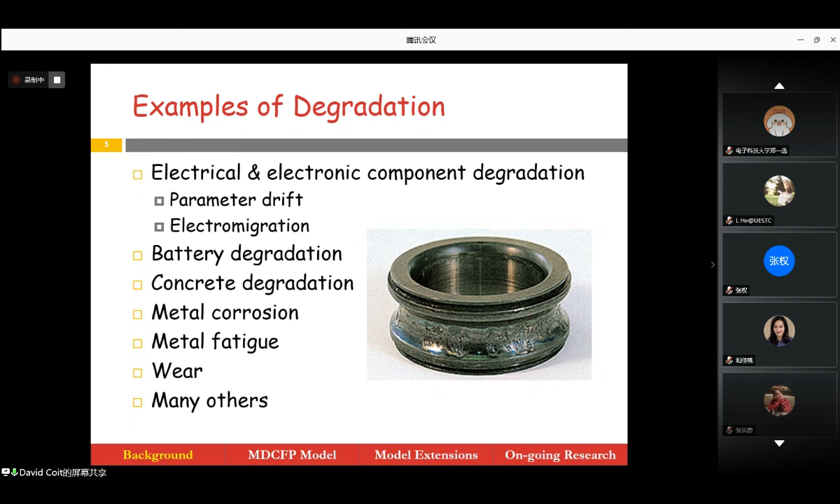Electronics, we usually don't think of as degrading, but there's some examples where they will as well. Batteries, which is a very popular subject matter lately to study the reliability of, degrade in terms of their charge and discharge cycles and how much they can charge. Concrete degradation, which we're studying in bridges, metal corrosion, metal fatigue, wear, and many others.

Let me go into more detail. Now, metal corrosion - you have some metal surface like the pictures show, and there'll be some form of oxidation, a chemical reaction that takes place. And of course, in the design of these products, you try to prevent that. And that leads to some very interesting behavior, where the degradation takes place in two stages: once the initiation of the corrosion, and then once the corrosion initiates, the propagation.

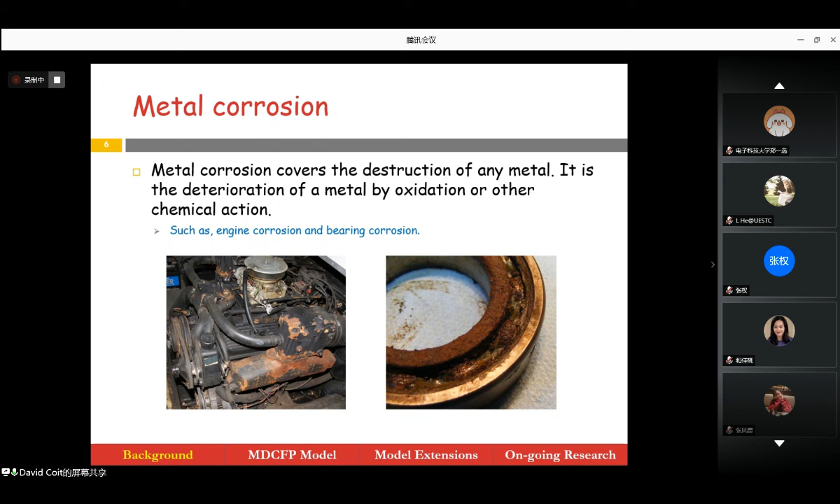And I will talk about that later, and the reason is the current project we're working on - we're working on a project on metal corrosion. I don't know what it's like in China, but in America, specifically New Jersey where I live, we have lots of bridges, and I think the metric I've seen is up to a third of the bridges.

Many of them are very old, could be considered unsafe to a certain degree. The concrete has cracked, or there's some other forms of degradation. To build a new bridge and make it strong, you have a metal rebar. You see on the left some pictures of the metal, different types of metal rebar, some samples, and they're encased inside the concrete. For about a year, we've been testing rebars and measuring the corrosion.

You see in the middle picture some examples of corrosion. On the picture on the left, I'm not sure what the one is in the center, but we're studying the other four types. You have black steel, which would be the most common, you can coat that with epoxy - keep in mind, these are going to be inside concrete. But then stainless steel and the MMFX would be more expensive and higher performance. And so the reason we're doing this testing is how much more reliable will they be - in other words, are they worth it?

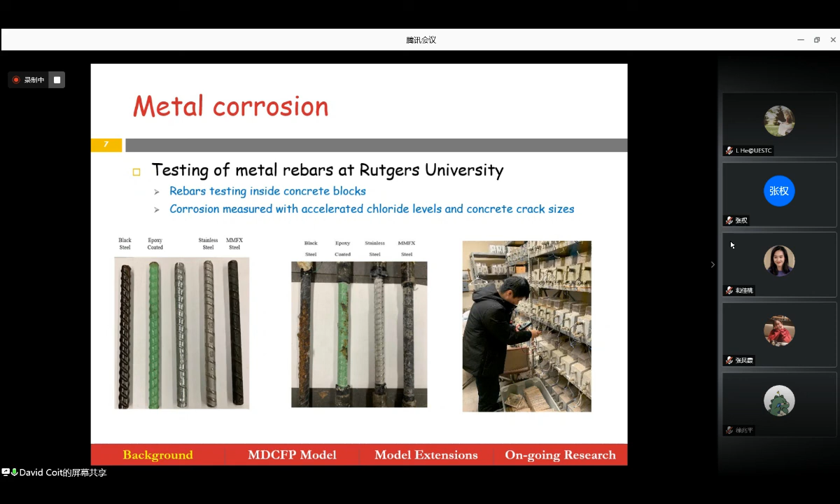And on the right, you see that's Rutgers IE student Jen Hong Lee. I think I saw he might be listening. It's not a real picture, he's just kind of posing.

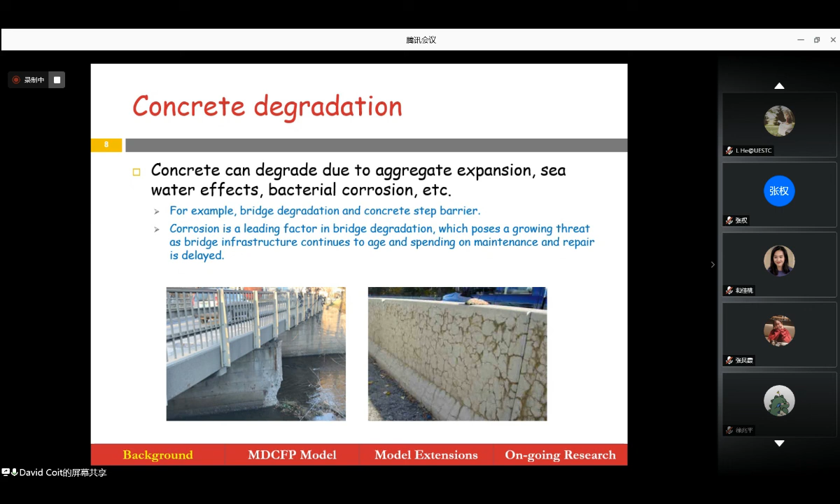So related to the rebar, which is metal corrosion, now you have concrete degradation. So the concrete itself is degrading, cracking basically. But as the concrete cracks, moisture and pollutants and other things can permeate into the concrete. And of course, that's when perhaps the rebar would start corroding.

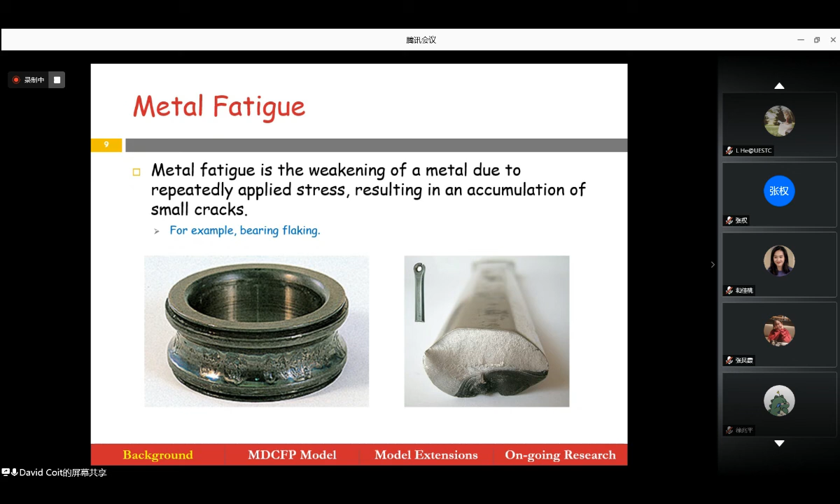Metal fatigue due to stress cycles, and an example of that is here - this is some testing. Qianmei Feng from the University of Houston and I had a very successful National Science Foundation grant.

Her university, the University of Houston, and the manufacturer of stents donated not the stents themselves, but some test samples of the material. She was able to solicit funds from the state of Texas to pay for testing. This is the actual testing done for our project to look at the metal fatigue of the stents. If you don't know what a stent is, it's something that goes into the human body, into your vein, to keep the vein from closing.

So very important. In fact, we wrote one paper treating the human body with multiple stents as a system of degrading stents.

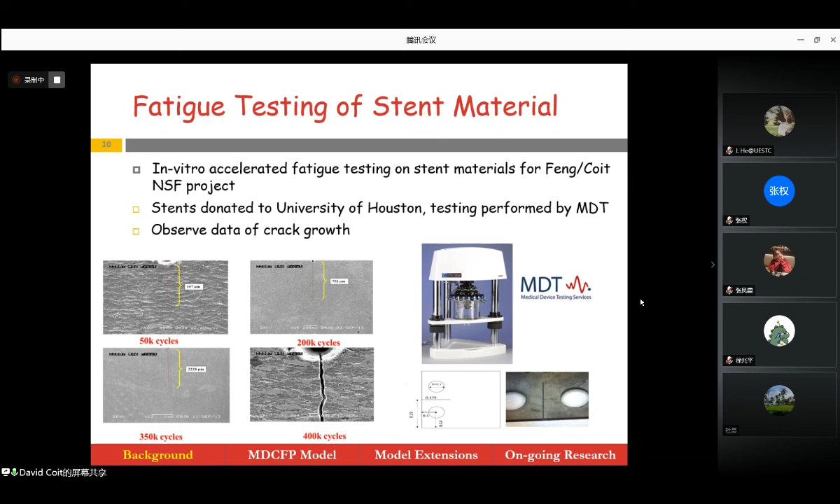Of course, there's wear that we're all familiar with. Anyone who drives a car has wear on their tires or on their bicycle tires. Many other things, many other surfaces wear.

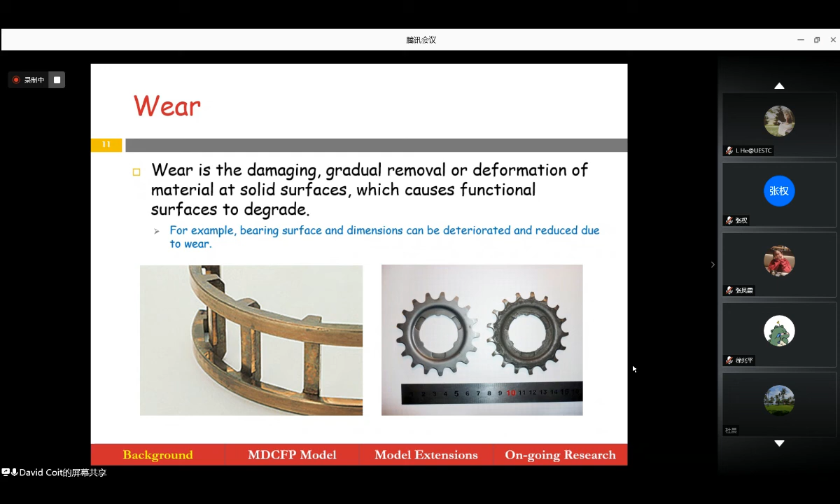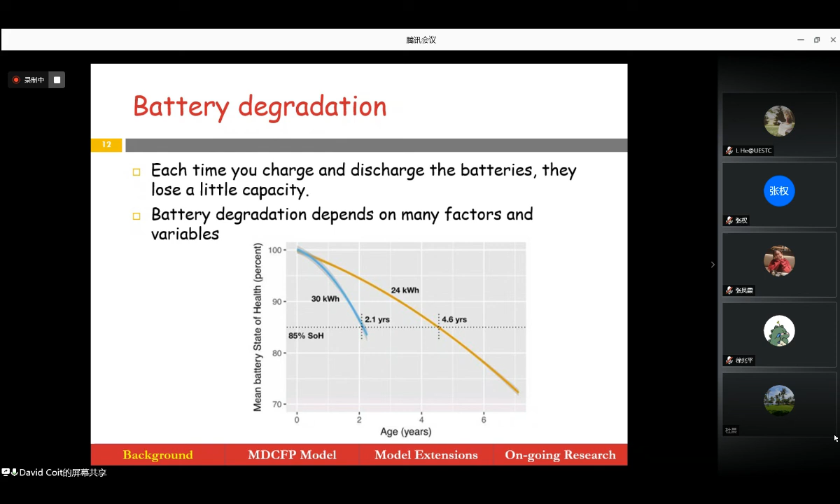Battery degradation—I'm not exactly sure all the reasons why, but right now it's very trendy in America to do work on battery reliability. How they often measure the reliability is what percentage of the original capacity remains when you recharge the battery, like your phone. That amount will continue to decrease until the performance is so poor it's considered a failure.

Now I want to make a real important point here. Of the degradation failure mechanisms I showed, many of them—fatigue, corrosion, wear—are monotonic. What do I mean by monotonic? They don't get better. They only move in one direction, they get worse. The wear on a tire tread gets worse, it doesn't get better. That's an important concept, monotonic failure.

Why is it? Well, the choice of degradation model is important, and some models are monotonic and some are not. The choice of model should match the failure mechanisms. In my studies, most of them are dealing with monotonic failure mechanisms.

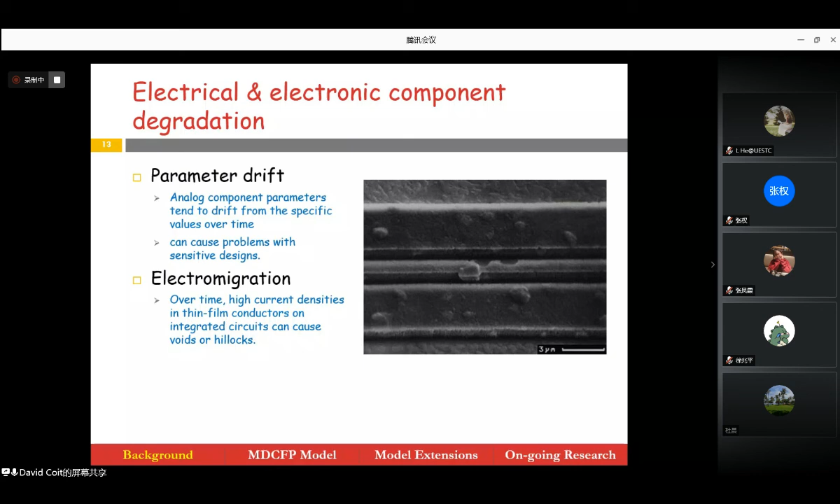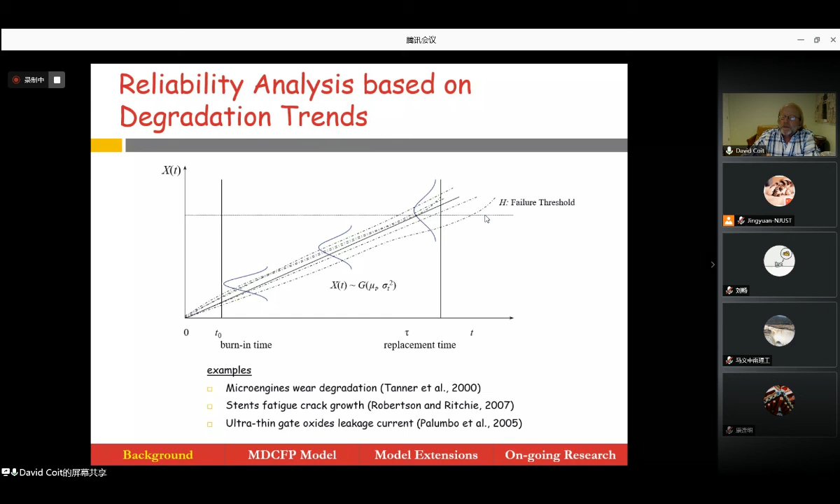Now, let's review, back up. I've been a professor more than 20 years, I teach reliability, and I did research in reliability even before I became a professor. Let's summarize different approaches.

What's the traditional approach? If you buy a textbook in reliability, or attended my class—I haven't been teaching reliability lately, but I used to—I would give you the traditional approach. What is that? I collect data of time to failure, and I fit some distribution: exponential, Weibull, gamma, something else.

And then I use that information to construct a system level model. I make certain assumptions: I assume it's a homogeneous population, and I assume the failure times of components are independent. And I have a model.

Is that a good approach? Well, sure it is. Are the assumptions always correct? No—the failure times might not be independent, the populations might not be homogeneous. But what's another deficiency? Mostly we study the reliability of things that are already reliable. Does that sound wrong? But it's very true.

If something's not reliable, often it's sold for price, or maybe due to the change of technology it's not anticipated to be used very long. When we study reliability, often we're studying things that are already reliable. So you might say, well, if they're already reliable, why study it? Well, it's because they're really important. And because they're already reliable, it's hard to get data. That's an issue.

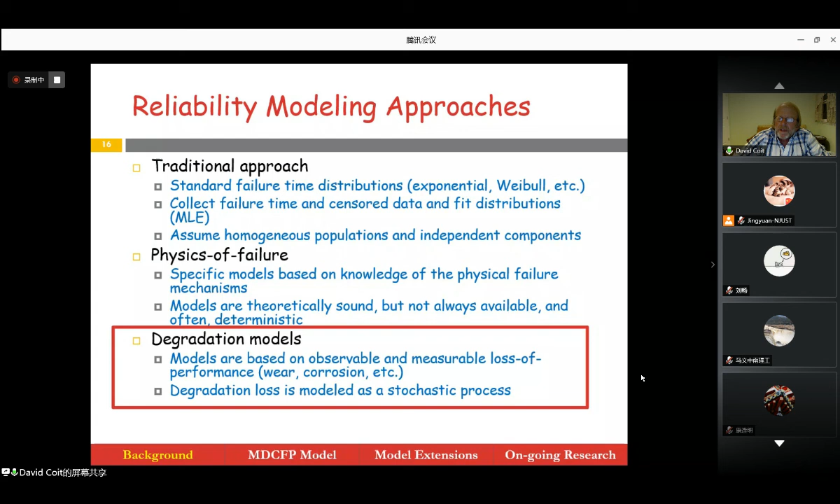So that brings us to degradation models, which is today's talk. So I have this observable and measurable loss of performance, and I'm going to characterize that, or model that, as some sort of a stochastic process. Why? What are the benefits of that?

Second, I can use the degradation model for condition-based maintenance. And let me add, not on my slide, for predictive maintenance, where if you're not aware, a failure time distribution doesn't really give me that benefit. It tells me when it's going to fail probabilistically, but not when it's a good time to do maintenance. I can do time-based maintenance based on a failure time, but the most cost-effective maintenance is condition-based maintenance. When the degradation deteriorates to some unacceptable level, but has not failed, it's a good time to replace it.

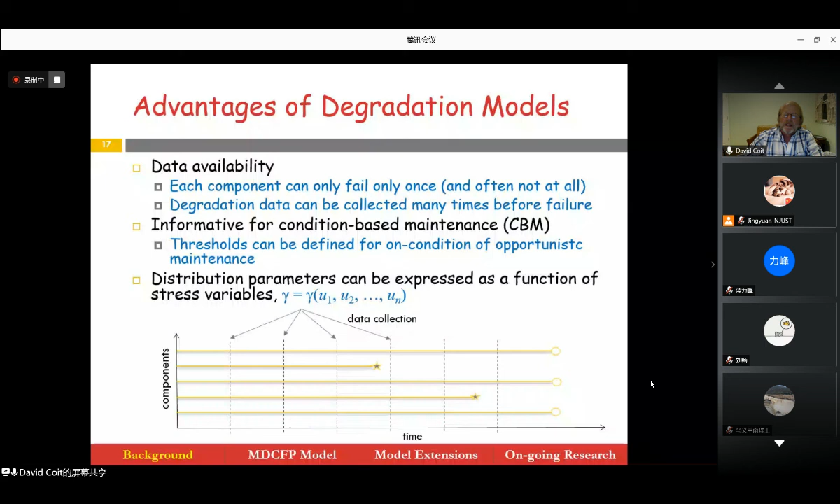I don't know if Bill Meeker wrote the very first paper, but it's certainly the first paper that popularized this idea of degradation models. Bill and I both happen to be natives of New York State, and he wrote this paper in 1993, Lu and Meeker, in Technometrics. And I could be wrong, but other than a few statisticians, I'm not sure a whole lot of people read it at first. But they did eventually. It took a while, but 10 years or so after that paper was written, lots of people read it. So I give him credit, certainly for popularizing it.

I sent Bill some emails once, asking him - Bill is short for William, if you don't know, I suppose I should say Professor Meeker - how did you think of this idea at the beginning? And he had been working at Bell Labs and was able to work on this. He's been a professor at Iowa State for, I don't know, 45 years, I think. And I'll add, he's a speaker at the APARM conference, one of the keynote speakers at the APARM conference next month in August.

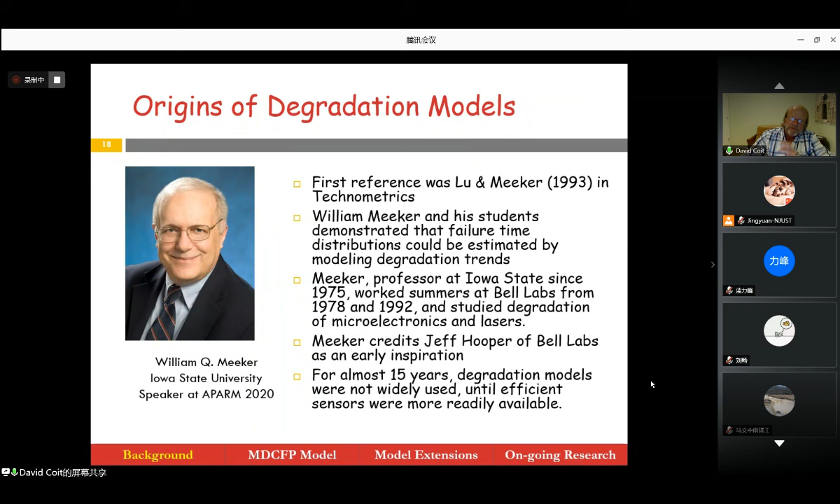That was intended to be in Vancouver. Now it's online, and I doubt they're listening, maybe. But the organizers, Ming Zhou, Stephen Lee, they've done a tremendous job. So I would encourage anybody. They got speakers: Meeker, Wei Kuo, Andrew Jardine, tutorial speakers. I will give one: Enrico Zio, Kailash Kapur. So anyways, that's my advertisement for APARM.

Now, degradation models. Before I talked about monotonic versus non-monotonic. So there are many choices.

Meeker's original model, which now we can look back and say, well, kind of simple. It has various names, but I call that the random effects model. I have some degradation equation, and I treat the parameters of that equation as random variables. And that gives me this distribution. Many of my early papers took this approach.

A gamma process is another very popular approach. Most of my current work uses the gamma process. That means between any two points in time, the difference in this measurable degradation follows a gamma distribution.

But time goes on. A Wiener process, which is based on Brownian motion, that's non-monotonic. Inverse Gaussian process, popularized by Zhisheng Ye and his students with a famous paper with Nan Chen, and others as well. My talk today, though, not just my talk today, all my work, most of my work, the majority, not some current papers I'm working on, is the random effects or a gamma process.

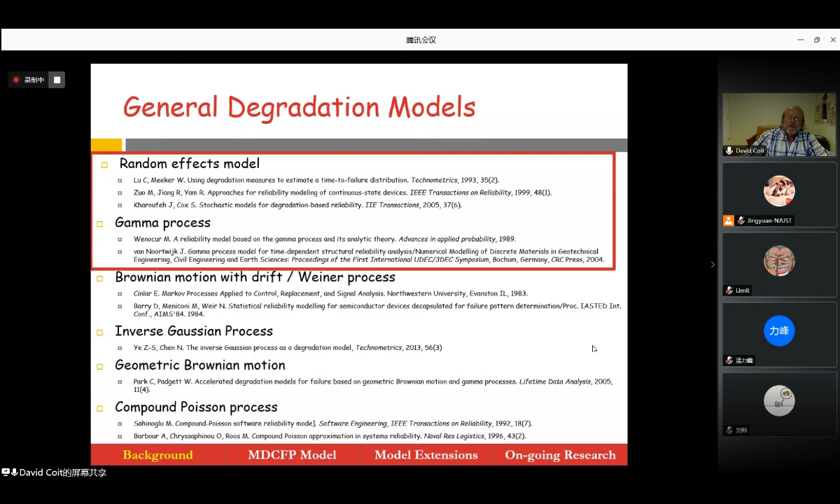Okay, so that's the first third of my talk, the background, and that's intended for a general audience. I don't really know my audience today. I can't see you, but feel free to send me an email later.

Second part of my talk, I'll try to do quickly. This is my earliest work, the multiple dependent competing failure processes. But it's necessary to describe this because everything kind of starts from there. This is the work with Qianmei Feng, our first paper almost ten years ago now, published at the time in IIE Transactions, now IISE Transactions. This is the first time we introduced this concept of multiple dependent competing failure processes.

This paper has also with Hao, who is in Beijing now. This paper has been very widely received.

In fact, on Web of Science, this is my third most highly cited paper. And you might think, third, well, why not first? Well, I don't want to brag, but my most highly cited paper has the most citations in the history of the journal Reliability Engineering and System Safety. That's a kind of tutorial paper. My second most highly cited paper has the second most citations in the history of the journal IEEE Transactions on Reliability. So this is third. It's well received.

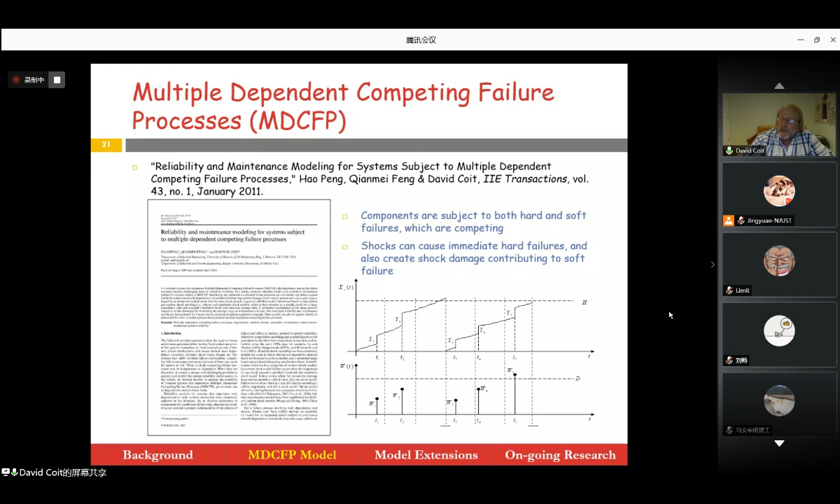So the same component can fail due to two of these processes. There could be more than two, it could be generalized. But we picked one that was a shock process on the bottom and one that was a degradation process. However, you see something a little different. When the shocks occur on the bottom, there's also some incremental change along the top. And notice those vertical lines, they line up. So when there's a shock, there's also incremental damage to the degradation process.

Now, in this paper, we use the terms hard failure, soft failure. Let me go on record saying I don't particularly like those terms. We didn't invent them, they've been introduced by other people. We use these terms, and they're a convenient mechanism. I don't really know exactly what it means, hard and soft. I mean, hard like my table and soft like my pillow. But the way they're used is this: soft failure means what we've been talking about, a failure that occurs due to gradual degradation. You can observe it getting worse, and because you can observe it getting worse, you potentially can prevent it. Hard failure is something that happens suddenly without warning.

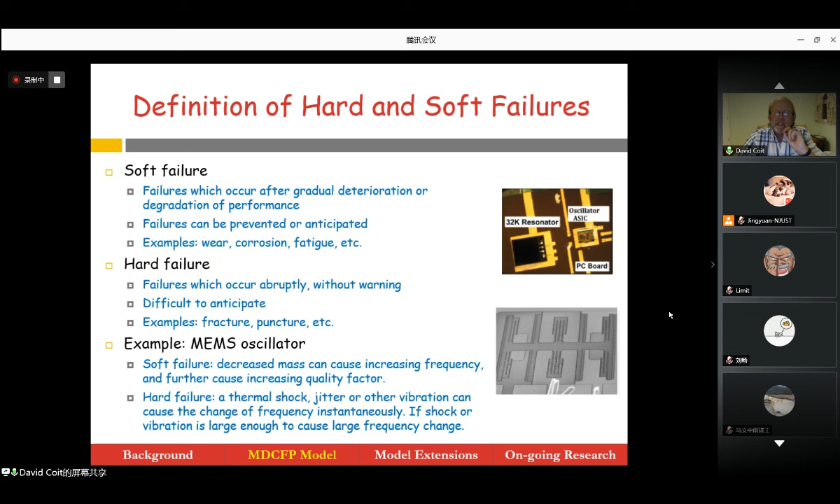Let me move ahead, but from our first couple papers, we used this MEMS oscillator. We were very lucky, we got some data from Sandia National Laboratories, and most of our early papers used this MEMS oscillator. It started just as one pin joint of the MEMS oscillator, so a very, very small mechanical device subject to both hard and soft failure.

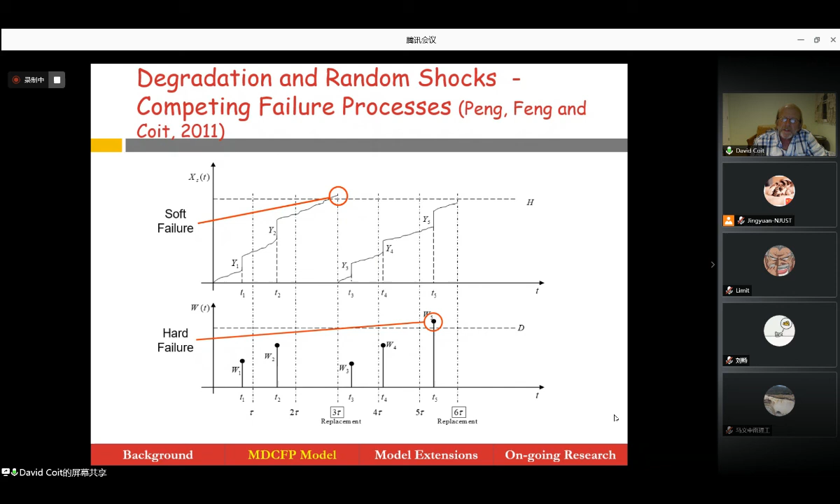So here's the graphs again. As time goes on, these two failure processes, they're competing. What does that mean? They're competing just like if you were running a race, and whoever wins the race is the winner, or whoever gets to the finish line is the winner. Here, the two failure processes are competing to see which one can cause the failure. So you can have a soft failure, meaning you've passed that threshold, or a hard failure. So you notice when the soft failure occurs, a new component, where the degradation went down to zero, or replacement was used. So in the first cycle, it failed soft. The second failure, it failed hard.

Now, so we defined competing, and our first paper was just—we show this whole MEMS device here, but our study was just on the pin joint. So you see in the lower left, the gear and the pin joint, and we were just studying failure of that pin joint.

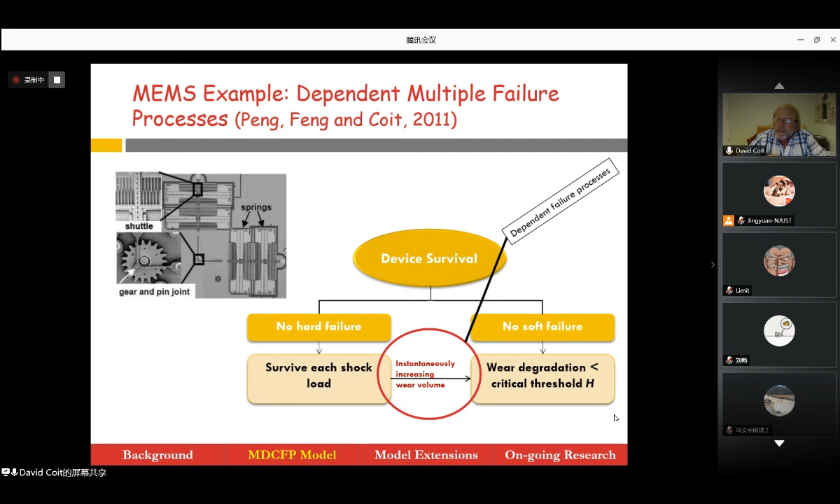It was degrading as the MEMS was being used, but it was also subject to shocks that would cause sudden failure. This is a very small device. So for the part to survive, it had to have no hard failure, but when it received a shock, it also affected the degradation. And that created dependency—meaning, for example, if it was subject just randomly to a lot of shocks, it's more likely to fail hard, but also more likely to fail soft, because there would be more of those incremental failure damages.

So it's supposed to be an animation here. It didn't work. That's okay.

But we see as time goes on, the shocks occur. It could occur as a Poisson, homogeneous Poisson process, maybe something else. But for each individual shock, we have an assumed, or hopefully based on something, probability density function for the shock magnitude. And we also have a failure threshold labeled D. Now, we don't know how many shocks there'll be in a given time—it's a random variable. But for each individual shock, it would just be the cumulative distribution function evaluated at D. For example, if it's a normal distribution, D minus the mean divided by the square root of the variance. It could be any distribution, however.

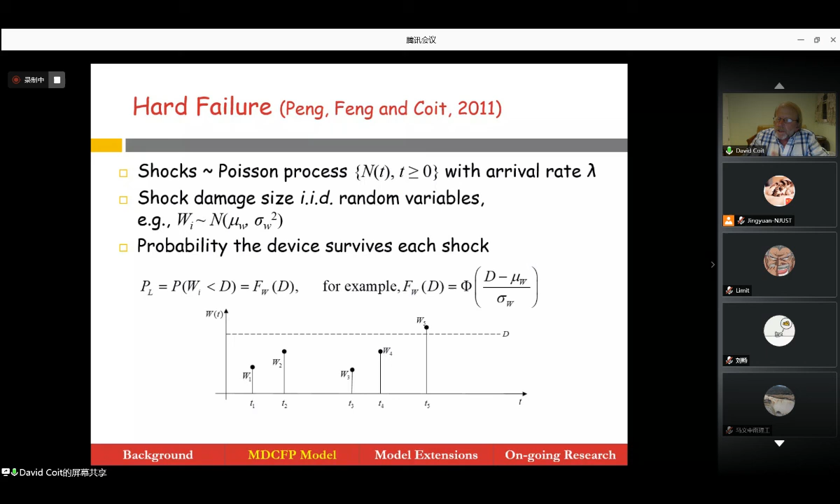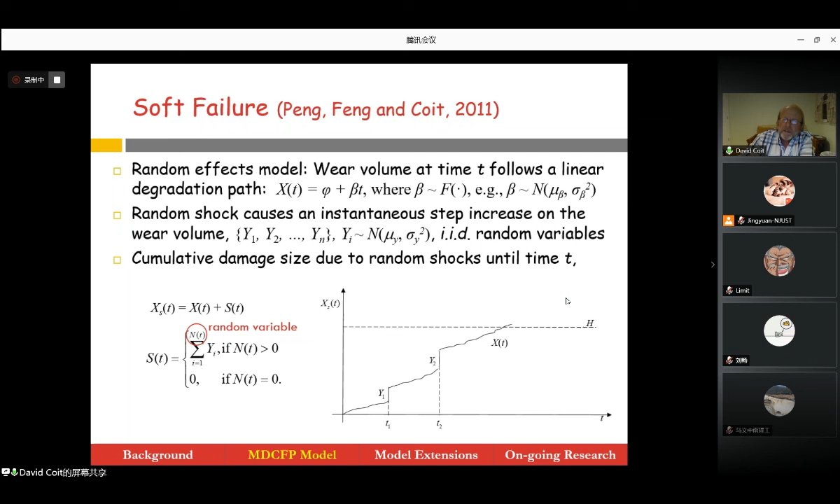Now, the soft failure—we have X subscript S. So it's equal to the smooth degradation plus the sum of the shock damages. So Y is the shock damage. Here's the important thing to notice: S of T is the sum of the shock damages, and N of T is a random variable, meaning this is a sum of a random number of shock damages. So that makes it harder.

I can then take that and construct my reliability equation. It needs to survive all of the n shocks, keeping in mind I'm summing from n. I'm having some PowerPoint difficulties—that's probably my fault, I made a mistake.

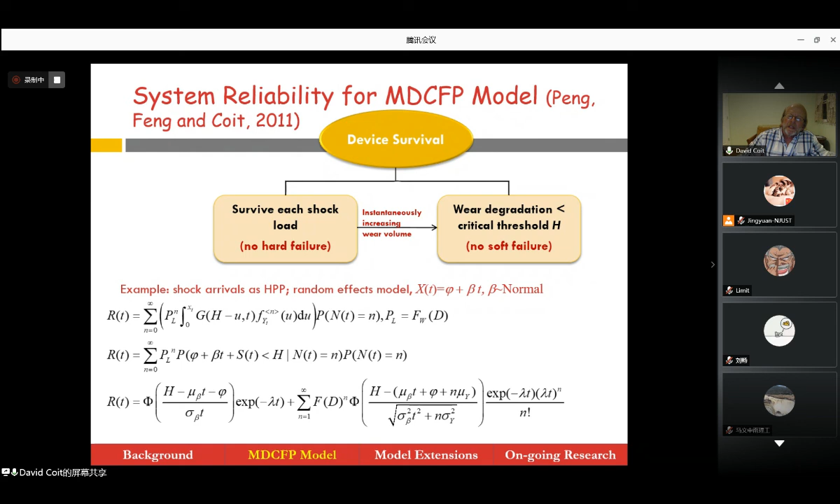So that's the most important equation in that paper. Here's an example from the paper, and I sometimes get annoyed—so please don't do this—because the example made certain assumptions, people think the paper was limited to those assumptions, and it was not. In the example, we could have a normally distributed degradation, homogeneous Poisson process, and we can easily then get a reliability equation. If there's no shocks, keep in mind we're summing, it's just the probability that the pure degradation is less than the threshold H, and then we sum over the others.

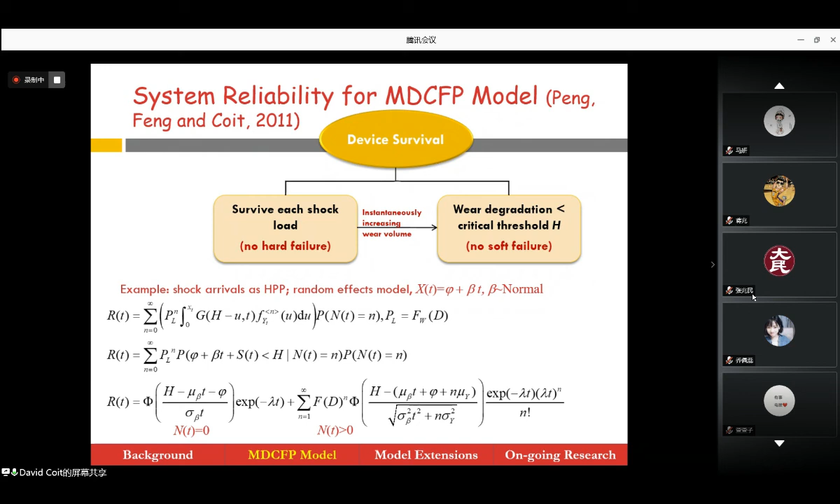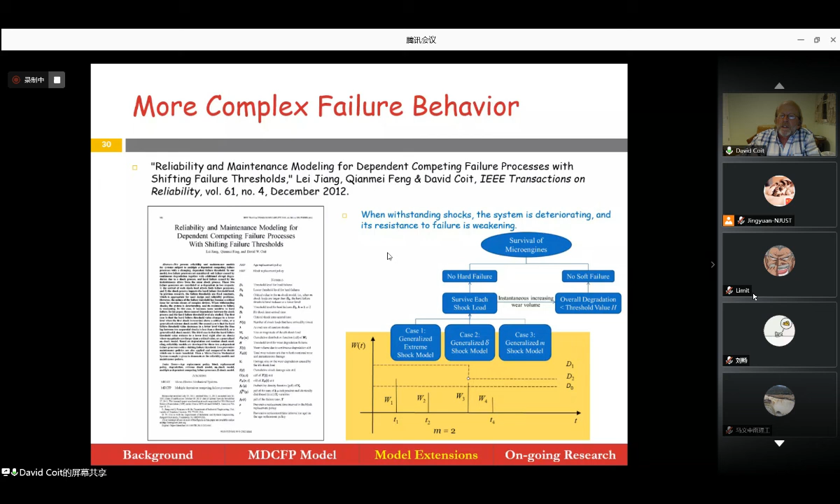This was mostly done by a University of Houston student, Lei Jiang.

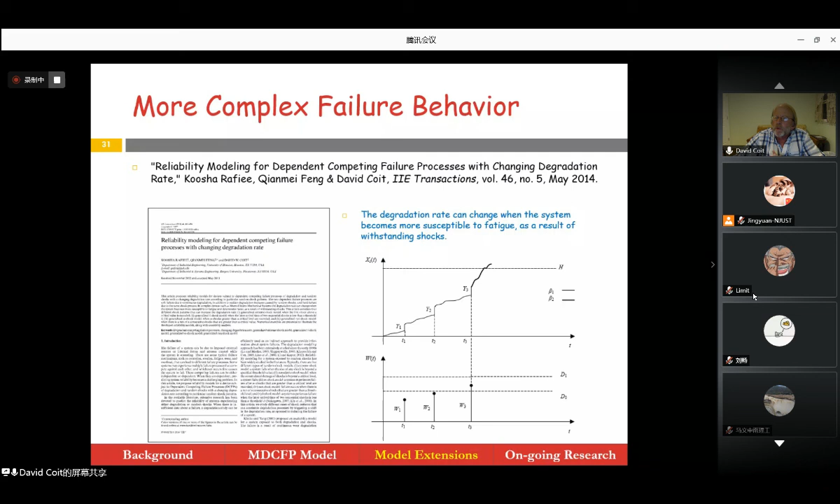This whole paper came from a conference in either Chengdu or Xi'an, where Enrico Zio asked a question: why can't you do this? So I went back and we did it. This is the degradation rate increasing if the shock patterns exceed D0, shown in the lower graph. I told my students, I'm a fan of boxing, where two people punch each other. If the punches are hard but not hard enough to severely damage, the opponent will still be weakened, and the rate at which they get damaged more will increase.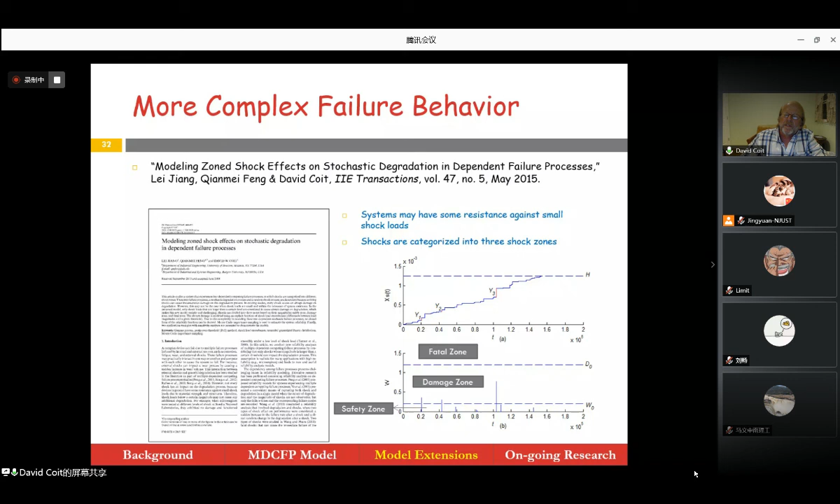Another extension: we said the shocks could be in different categories. Look at the bottom graph—we could have a safety zone with no effect, a damage zone where they have effect on degradation but not critical, and then a fatal zone. That was another paper, also primarily by Lei Jiang.

Now, this is what I wanted to talk about. I could use the rest of the time on this, but I won't. Our next extension was to move this into two-stage degradation models.

This was inspired by our work on concrete bridges and metal rebar. We've written two papers—they're ready to go, they're done. We're waiting for our civil engineering co-author. They're two stages because the corrosion of the metal rebar doesn't start—keep in mind, it's inside concrete—until there's been some sort of penetration, such that the moisture, the rain, or the pollution can reach it.

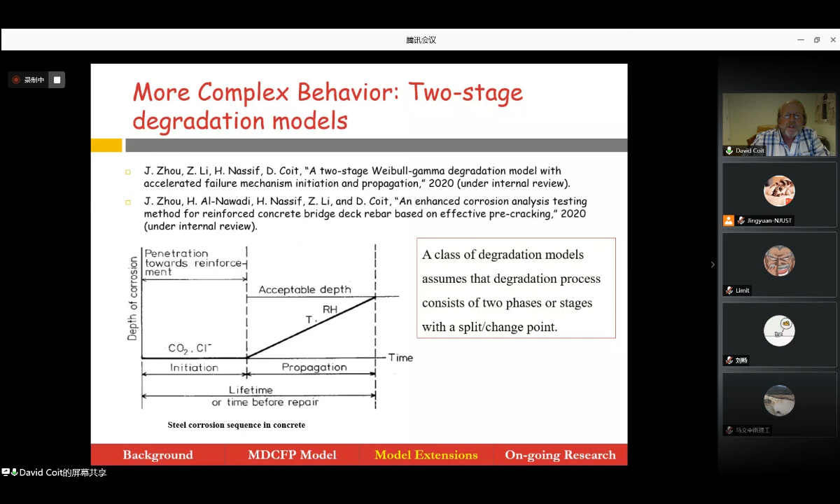So we have this initiation period, and my students started studying two-stage models. We see that the most impressive papers come from Professor Cui and his students at Beijing Institute of Technology. We're using some of those papers, shown along the bottom. I also see my friend Tao Yuan has a paper where he uses hazard rates that will shift.

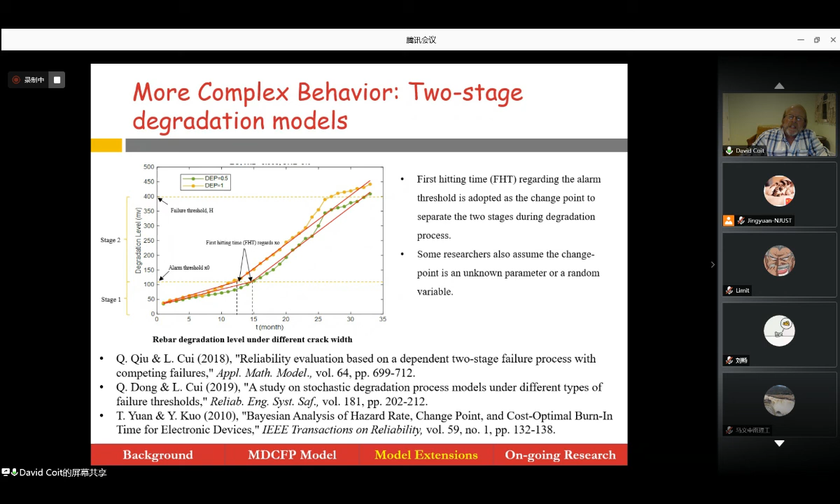So we realized the work we did needs to be modeled that way. We had lots of data, still do—2 different types of concrete, 4 different types of steel rebars. We want to accelerate failure; the reason we're doing this study is so we can accelerate failure in the laboratory, and then make judgments about the reliability of these rebars that are going to be used in the bridges over a long, long period of time.

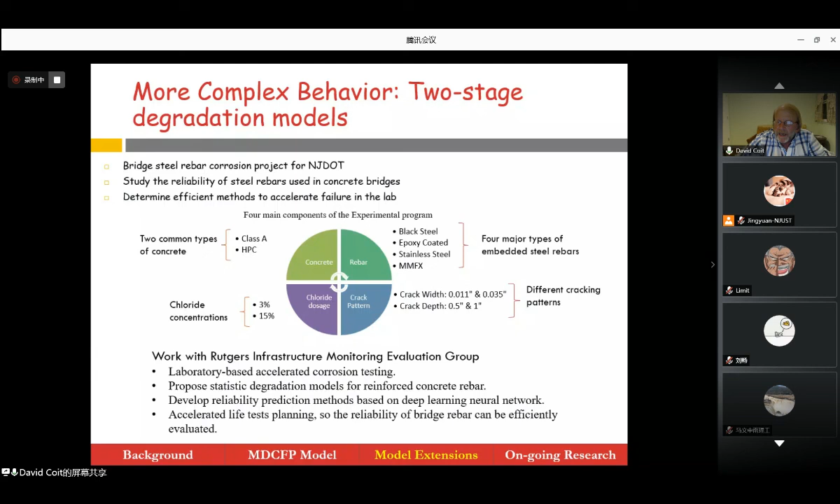How do we accelerate? Two ways: we increase chloride concentrations, which will mimic exposure to chemicals out in the field, and we can pre-crack the concrete to get the corrosion to start earlier. But that's no good unless we can mathematically translate what the pre-cracked concrete behavior means in terms of actual behavior. So that was our study.

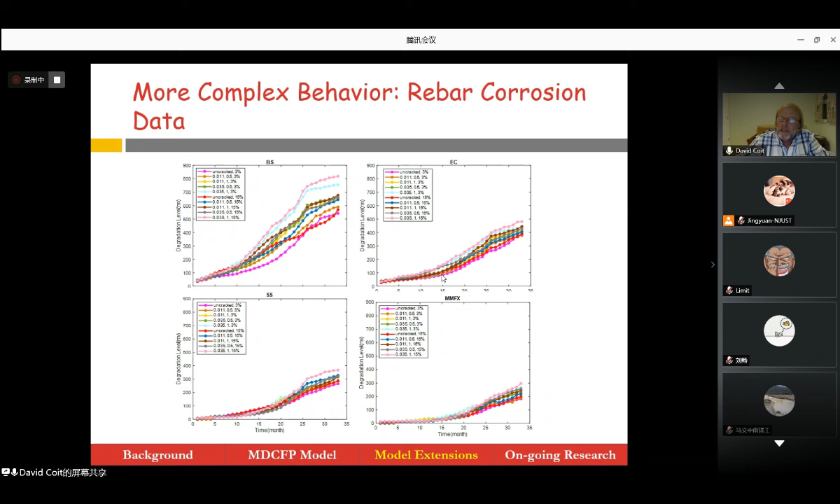We developed a new model. Stage 1, we thought, would be better modeled with a time-to-event distribution—the time until corrosion was initiated, or the time to latency. So our first stage, T1, is simply a Weibull distribution of time to event, like a Weibull failure distribution. But once the corrosion starts, we shift to a degradation stochastic process, which is a gamma process. So instead of gamma-gamma, which we did, or Wiener-Wiener, we actually have a Weibull-gamma two-stage model.

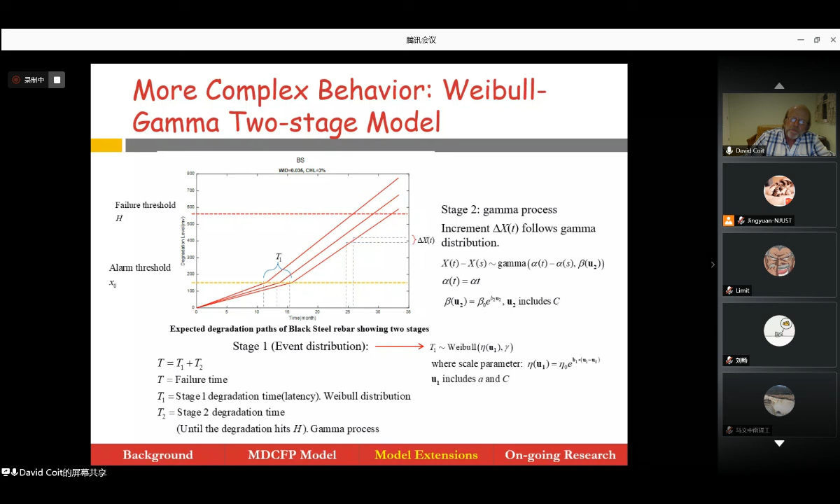This is very new work going on right now. I won't go over the equation in detail, or else we'll be here all night. But we can develop this equation where stage 1 is a Weibull time-to-event distribution—we don't know when the corrosion is going to start, it's a random variable. So at some point we need to condition and integrate over the probability density function of T1. Both stage 1 and stage 2 are a function of stress covariates.

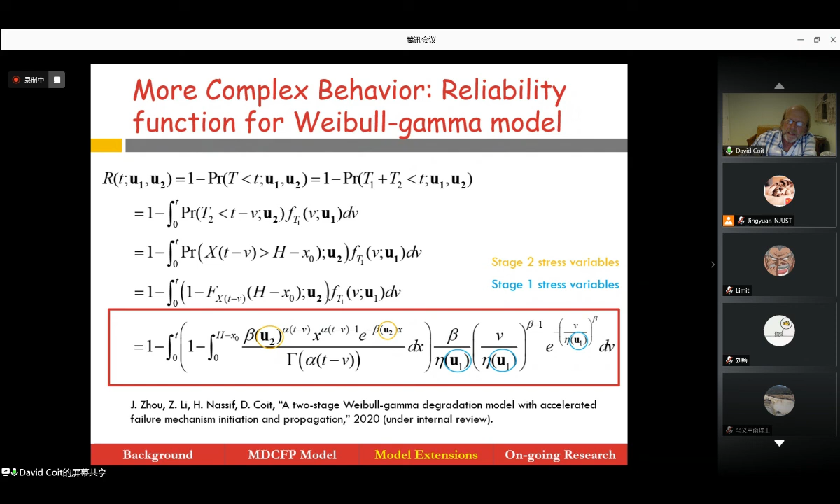Stage 1 has stress covariates, which for us was the size of the initial cracks. They're going to influence when the corrosion starts, and also the chloride concentration. Then stage 2, in yellow, those are the stress variables that influence the rate of corrosion once it starts. Chloride was in both vectors.

Okay, let me move on. We can use this to make accelerated life testing plans, and some more. Now we take the component and put it together in a system. The shocks come to the whole system, not the individual components. So this creates a more complex model.

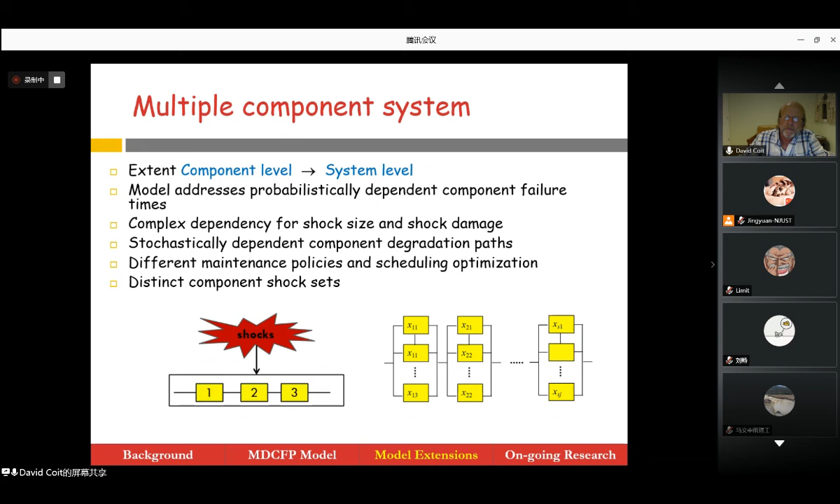So we have this paper by primarily Sanling Song, part of her PhD. Sanling Song now works for Aptiv, which makes self-driving software for self-driving cars, where we took what we already talked about and built it up to the system level.

So NT, which is the number of shocks, is a random variable, and NT appears on both failure processes for all components. So think about it: if just randomly NT is high, each component is more likely to fail due to hard and soft failures.

So everything is dependent. And I'm using the word dependent, not everyone likes this - I might say S-dependent if I was writing for IEEE Transactions on Reliability. But what do I mean by dependent? They're not independent - the covariance at some time t for any two components' degradation is not zero. So each component's two failure processes are dependent, but also the components themselves, the failure events are dependent.

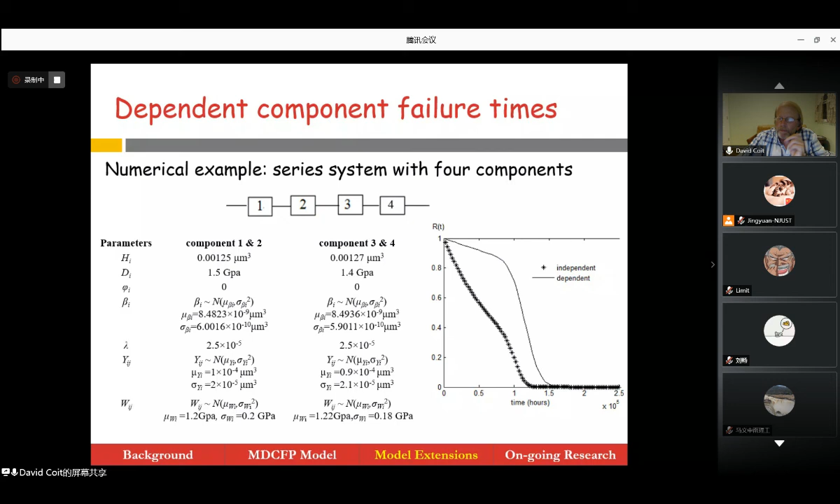...assume the reliability is much worse than if I model it as dependent. You might say, worse? I thought it would be better. No. Think about it in the extreme: if all components were dependent, very dependent, I could model the whole system as if it was just one component, let's say the worst component, because all the others would behave similarly. So when you assume a series system, the components are independent, you're actually being pessimistic. Okay, let's move on.

First extension we did, we say, look, there's different types of shocks - they're not all the same. If you have an automobile, you could have shocks from different geographic locations. So we extended this to a paper on shock sets.

The next extension we did, we said we had made some simplifying assumptions in the previous papers - all these papers I'm talking about right now, the system is packaged together. So think of your phone - your phone has lots of components, cameras, microphones, a screen, electronics, but they're packaged together.

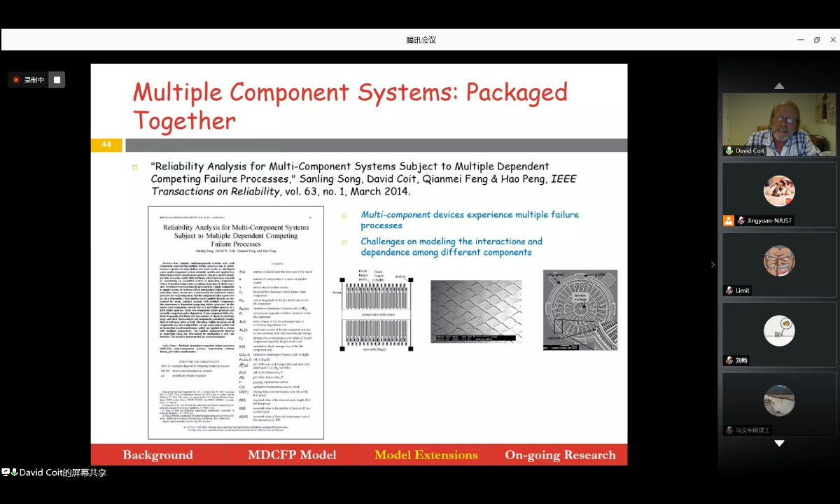My students tell me they will pay someone to repair maybe individual components, but for many of us, if our phone has failed, we'll get a new one. Your iPad, if you have one, other things. So they're packaged together. It's not convenient to replace the individual components within that system, although there are components. So these first papers are on systems that are packaged together. All of these papers, notice, multiple component systems packaged together.

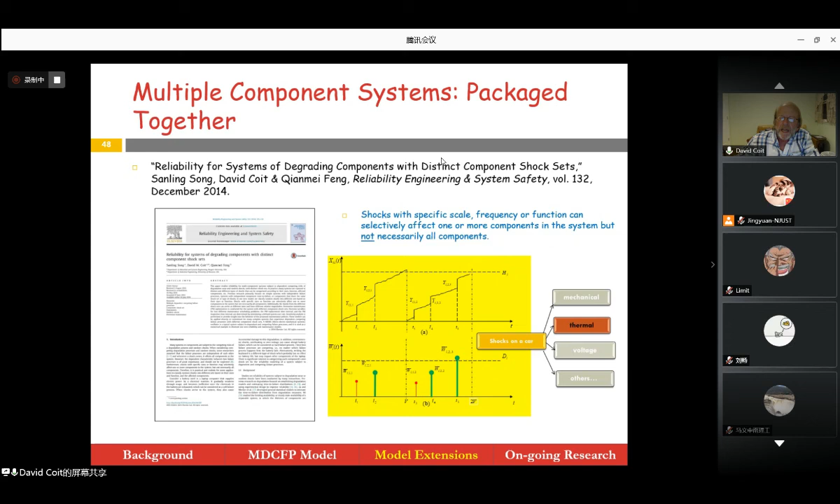This is shock sets. Our next extension, we wanted to model more accurate behavior on the distributions of the shock damages. I didn't make a big point of it, but in the previous paper, we said the shock damage, those Y variables, are independent. The failure processes are not independent, but the amount of shock damage in each individual shock is independent, meaning component 1 and component 2 has independent shock damages.

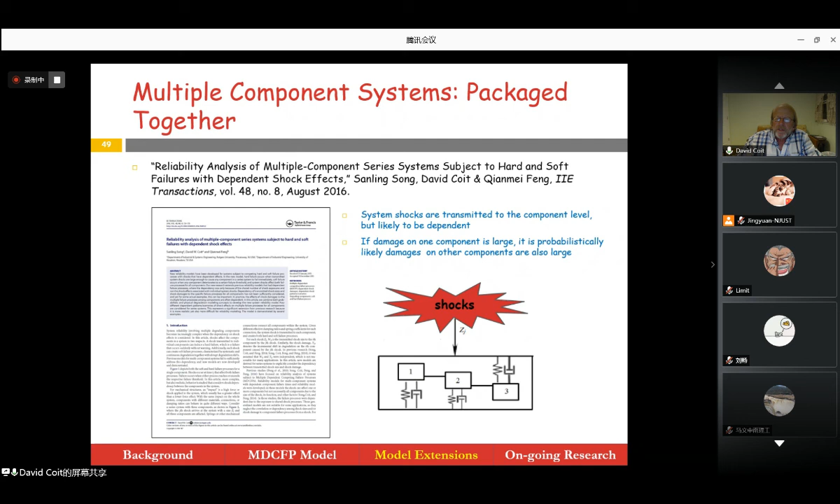Well, that didn't seem too realistic, and so I asked my student, let's try to fix that. And we then wrote this other paper that is 2016. And we made it kind of a simple model.

Now notice, when the shock comes in, that's Zj, it comes to the whole system, not to the individual components. But what we want is ZJ to be the shock magnitude for the whole system. But then there's a transmission till it reaches the components. And we use these simple equations down here. Unfortunately, there's a small typo - the beta should just be beta subscript I. So we have a transmission to each component I, but J is the jth shock to the system.

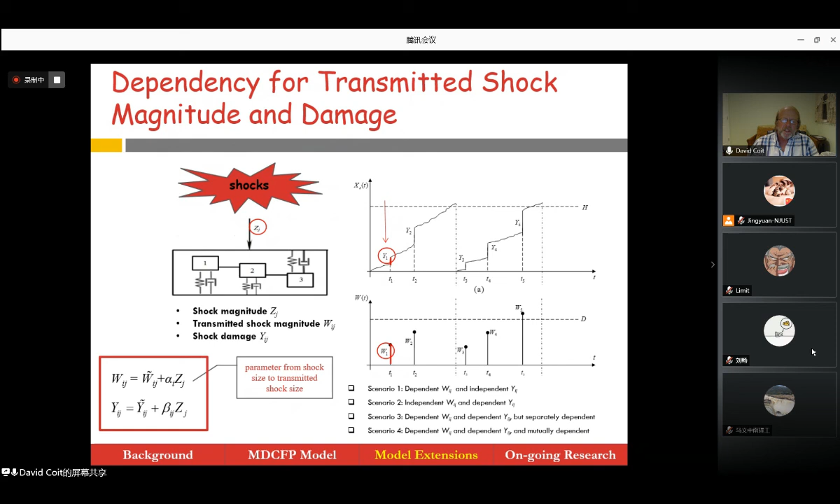So alpha and beta dictate, or just what is the amount of protection. If alpha and beta are low, the shock sizes won't be that big to the components.

The next extension, just accepted in a journal, we said there could be more forms of dependency, and we say the different components - this is just accepted, I don't have a month yet, but in Reliability Engineering System Safety - we say the components can degrade in clusters. What does that mean? It means as they're degrading, certain components within the system might be degrading as a group. Now, why would that be? Well, let's say one component, as it degrades, gets very hot, heats up, which will influence the components that are close to it.

And so, which means they might degrade higher than anticipated too. And so this is a new paper. I think it's available, although there's no date on it yet. So we see that the components, in case 1, they're together as a group. In case 2, they're low.

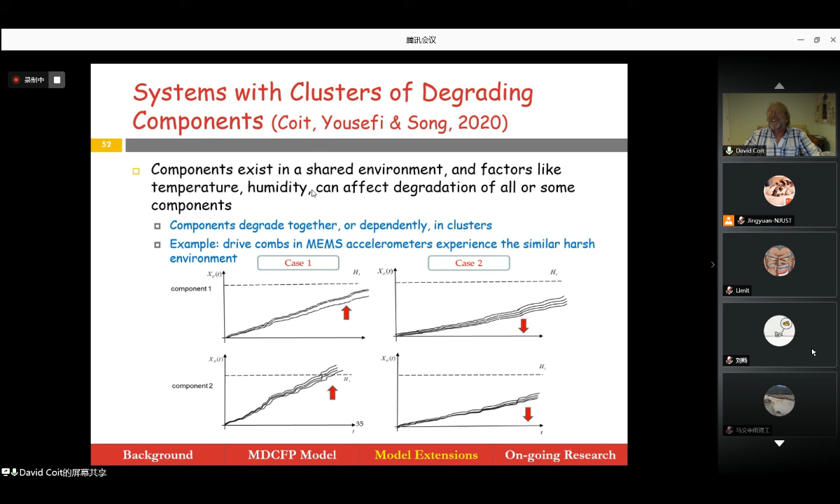So this is, I don't know how common it is, but this is another advanced model. And this is Coit - I hope she's not listening. Yousefi is the first author. It's Yousefi, Coit, and Song. I'll need to fix that.

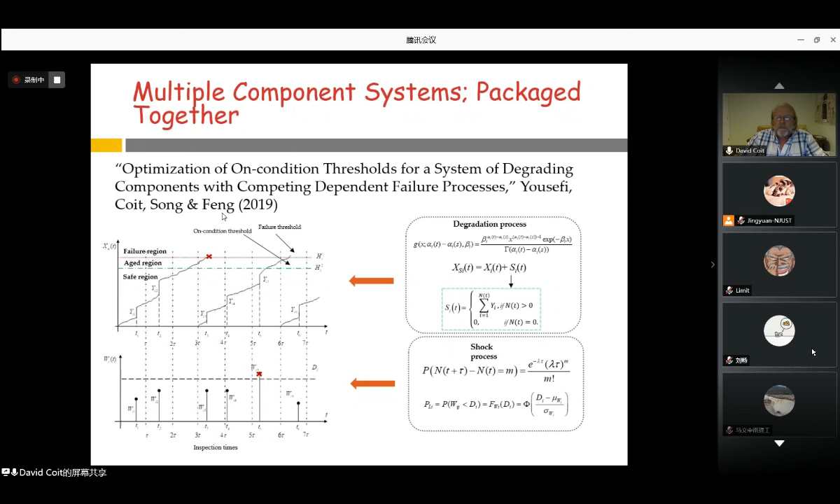Now, just like last week, I spent too much time talking in the early part. Now, what's some work that is ongoing? I had a master's student, Jingyu Chen from Chengdu, excellent master's student, back in China now. If anyone knows him, tell him I said good things about him.

I gave Jingyu - I said, we have these models of systems that are packaged together. There's many systems not like that. Let's think of a system like railroad tracks. You wouldn't replace all the pieces of the railroad track, you'd replace them individually.

So he wrote a very good thesis on this, and imagine this picture in the center of the screen. Now we're inspecting tau, 2 tau, 3 tau, and we don't know a failure occurs until we detect, and the X means a failure. But when we detect a failure, we just replace that component that failed, like the railroad tracks - you imagine the system is a system of railroad tracks. Now, we assume at the beginning of this system, all the components are new.

After a while, we start doing replacements, so in one inspection interval you're going to have a mix of old and new components together. Yet even though there's old and new, their degradation paths are still dependent due to the shock processes. So it's a different form of a problem. What we chose to do is wait till we're in steady state, shown in gray, meaning we wait until at the beginning of this inspection interval, the start times of the components are independent with respect to each other. So you've got some new, some old. At the beginning, they would not be independent - they'd all be new, and in the second one, most would be new. But eventually, as they go through many replacement cycles, our optimization problem was to minimize the cost rate in an interval during steady state.

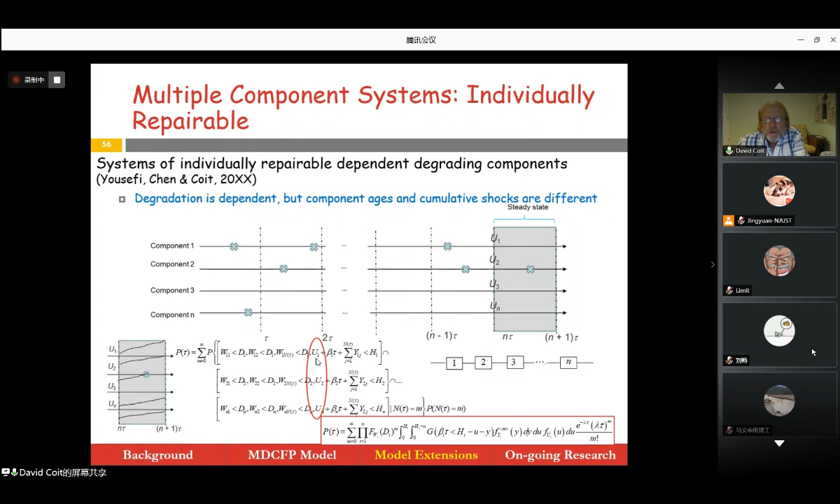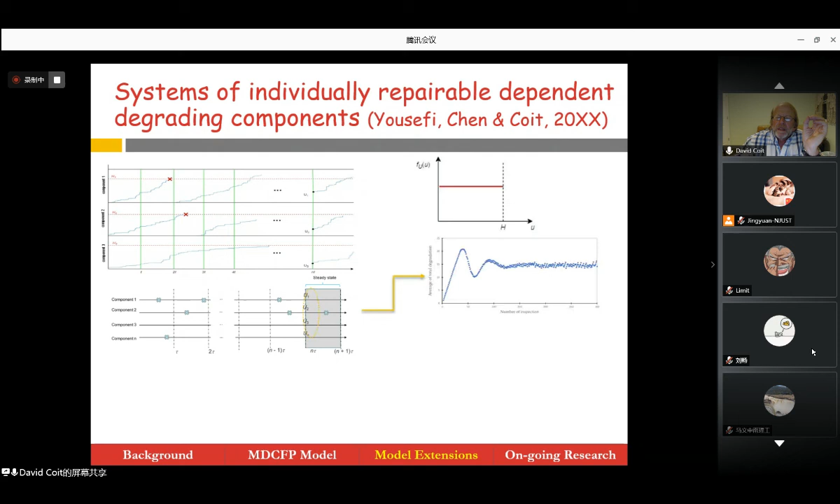Now let me go to the next slide. At the beginning of the cycle, you have 3 components. You have X of T - here T is just the inspection interval time. And you have U sub I, which is the amount of degradation at the beginning of the interval, so it's a random variable. And then you have S, which is again the shocks, but just the shocks in that inspection interval.

Jingyu spent a lot of time figuring out the distribution of U. Under certain assumptions, look at this graph in the middle - at the beginning, they're all low, and then they age together, but little by little they start to get replaced. The average over many simulation runs starts to decrease, but then eventually reaches some steady state, meaning way out in the future, if you randomly select, it could be anywhere in that interval. Under certain assumptions, not all, it will be a uniform distribution.

We submitted this to RESS and actually got a pretty good review, but then I withdrew the paper - maybe one of the reviewers is listening to me now. I withdrew the paper because I thought of a better way to do it. I want to get an analytical distribution for U. So I withdrew the paper, and we're finishing it up, and we'll submit it again, because this is the key part: what is the distribution of the degradation at the beginning of the interval for each component?

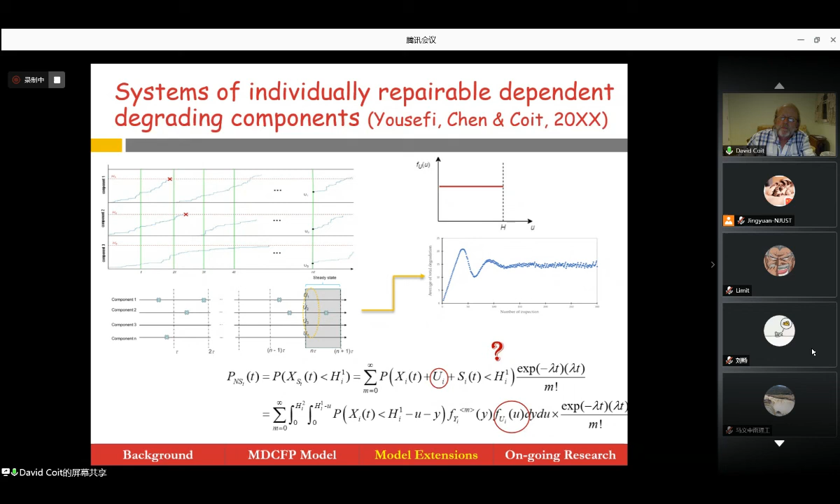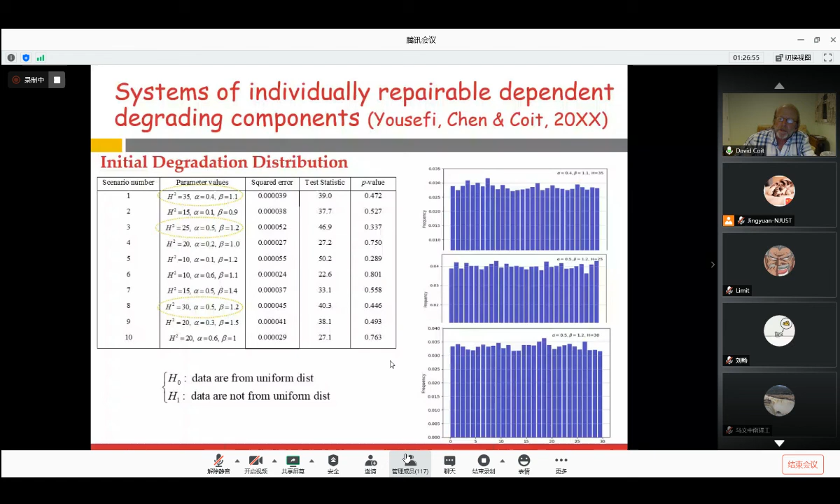I'll try to wrap this up pretty soon. We did many simulations, and you can see it is somewhat uniform, but only under certain assumptions. That's what bothered me, because I had to introduce some assumptions that may not really apply in some examples. So we're finishing this up again.

Let me make this the last one. This is another paper, Yousefi and Coit, just the two of us. At the MMR conference, I presented a very early version of this in Hong Kong last year. Now I want it to be dynamic. The previous model was static, meaning I'm going to get an optimal inspection interval and just always use that interval, and get an optimal on-condition threshold and always use this. For this paper with Nooshin Yousefi, my student - every time I inspect it, I can customize and dynamically select the next inspection.

Look at the graph on the left - you see the green vertical lines, that's inspection. For example, if I inspect and all the components have degradation close to 0, I don't need to inspect again for a while. On the other hand, if they're close to the failure threshold, I better inspect again soon. So we did different versions of this.

Every time we inspect, it's a difficult optimization problem. And we thought, well, that's not very practical. These are some hard problems to solve, not really very practical. If someone really wants to use this, I can't ask a technician in the field to solve a difficult optimization. And I mean, real difficult. These are non-convex, intractable objective functions, certainly highly nonlinear.

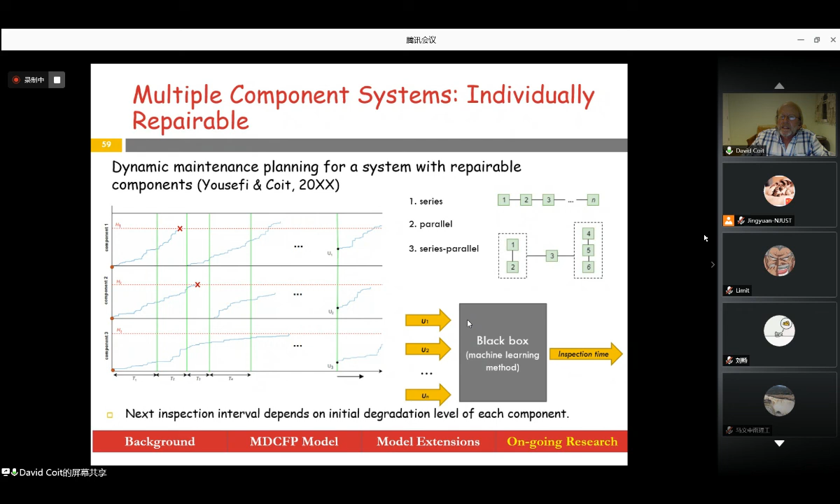So you see here the black box. Our first version, which I presented at MMR - and like all good professors, I shouldn't say that, I don't want to present my very best work because I know that's going to go to a journal - but at MMR, we just output inspection time: when should I do it next? But the paper that we're almost done with, in fact it's sitting on my desk...

...is we're going to, in each inspection interval, solve a problem: when should I inspect next, and what should the next on-condition thresholds be?

And if you are wondering why should they even change, there's always a relationship. If I'm going to wait a long time to inspect, I have to lower those thresholds. Don't have to, but it often makes sense because if I'm not going to look at this again for a while, I better replace it before it's even close to failure. On the other hand, if I'm going to inspect very rapidly, I know I'm going to see this again soon, and so I can put the thresholds up close to the failure thresholds.

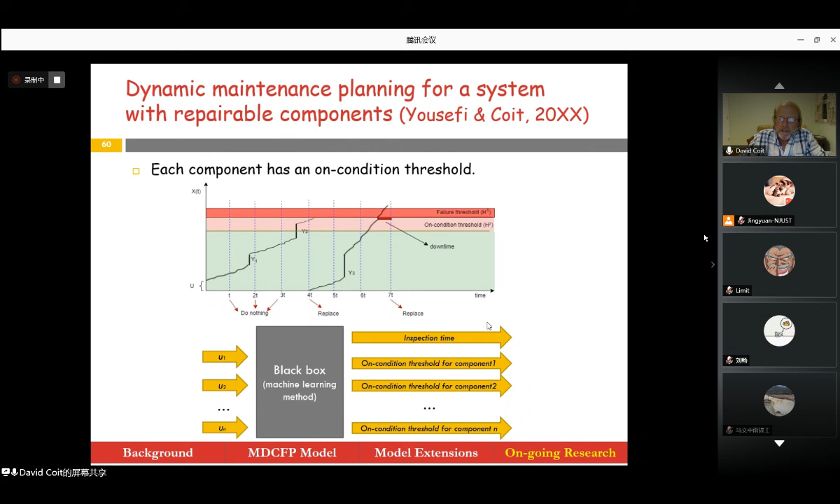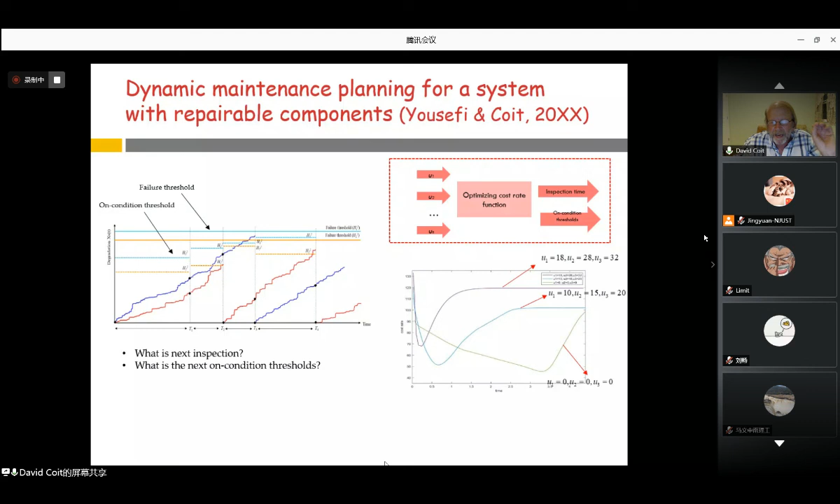We see U1 equals 0, U2 equals 0, U3 equals 0. That means the observed degradation at the beginning of an inspection interval - well, I don't need to look at that for a long time. And we notice the minimization takes place over here. On the other hand, these are two different curves. So it's going to be a purely dynamic model - every time I inspect, I'm going to get a new time to inspect the next one.

I've already gone an hour and 10 minutes, so let me wrap this up.

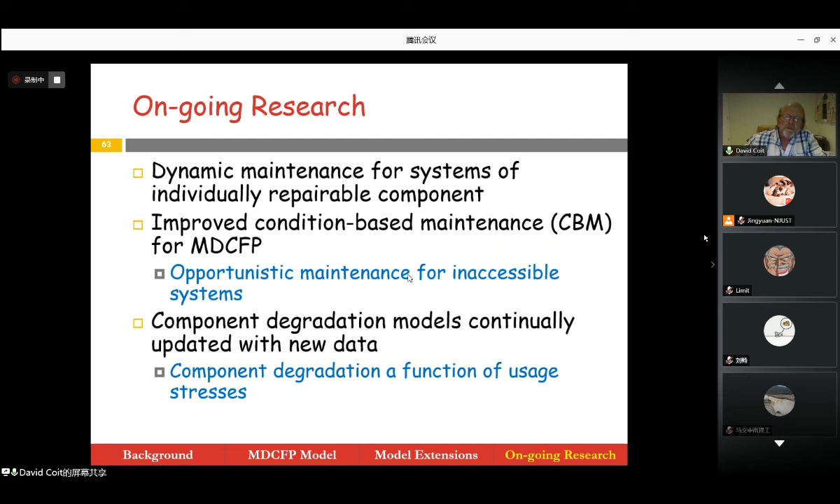Here's some applications. We've had the paper on stents, on some other behavior, and a paper with Yisha Xiang on performance-based contracting - ongoing research. Let me finish this up. We already have this paper - I know it's really, we put it in for a special issue.

This is our first paper on reinforcement learning. Again, this is going to be a dynamic model. I'll be glad to send this paper to anyone, but I want to tell you our best papers are still coming - so this was some preliminary results. No, they're not preliminary, these are some good results. We're kind of lucky to get this early version of the paper published.

But we have Markov decision processes, which then are used to dynamically say, what should I do given this current state of the components? And I'm mostly learning from my students on this, so this is new to me.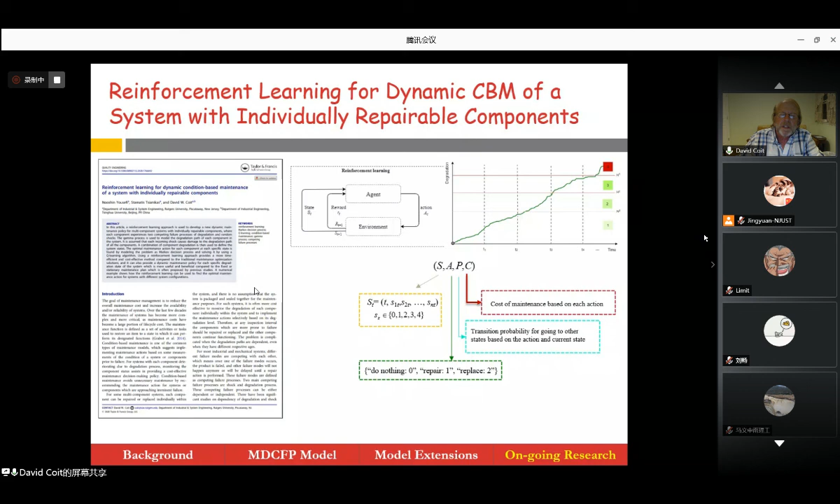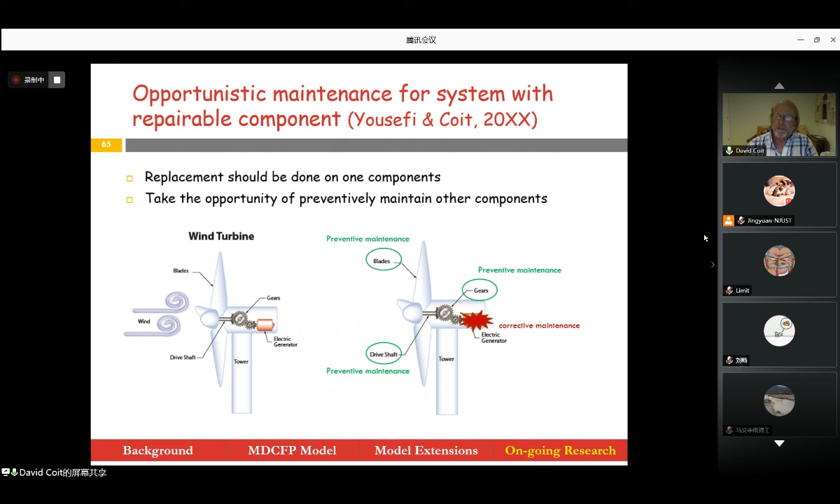And then the final thing I talk about, and I'm very interested in this, is opportunistic maintenance. We have one paper already - look at these wind turbines. We see the electric generator failed, which means that triggers a repair action, which means I have opportunities, maybe, to do preventive maintenance on the things nearby. Now, I'm not going to do preventive maintenance if they're still as new, but it gives me the opportunity to economically perhaps do some preventive maintenance.

And that concludes my talk today.